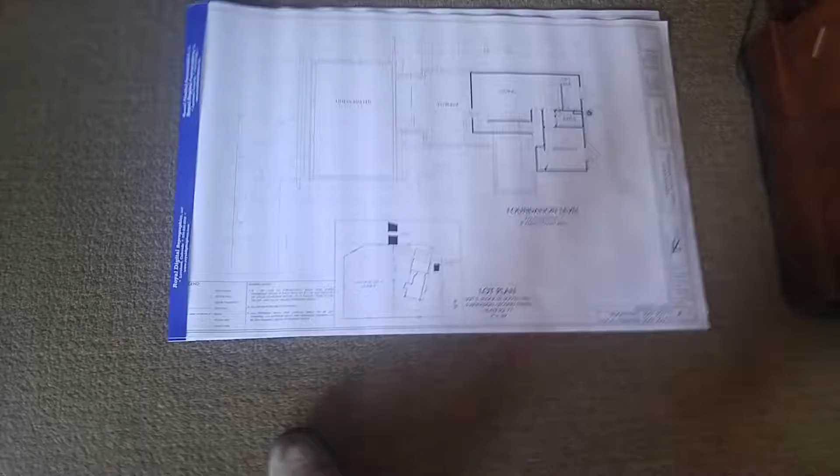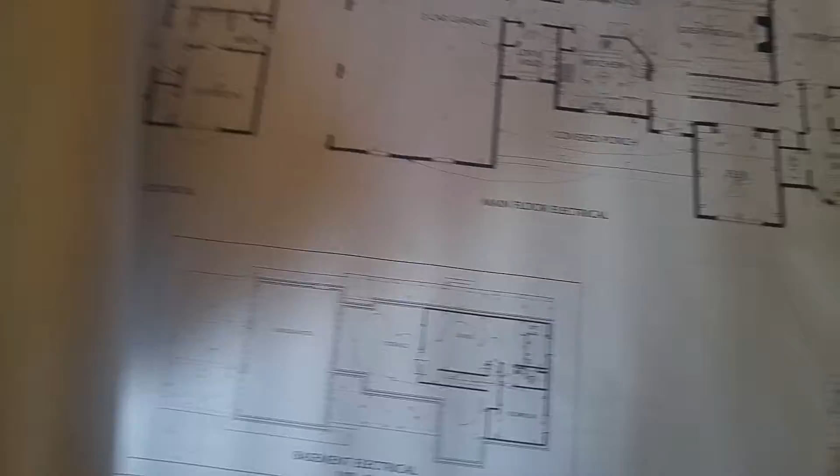Alright, first you got to do the architectural set of plans. This is the architect's job, or in this case, my job. Floor plan, pretty self-explanatory, all the stuff that goes into it, details of the home, section views, the trusses, things like that. All fun stuff you learn in college, or sometimes you don't learn in college. Elevation view of the house, everything everybody needs to know, electrical plan, yada yada yada. And that gets you through the biggest step, step one.

This is all the inclusions of a building permit for the town of Windsor. You can see there's a lot of check marks on there. I finally got this all done. So that was a bunch of those check marks.

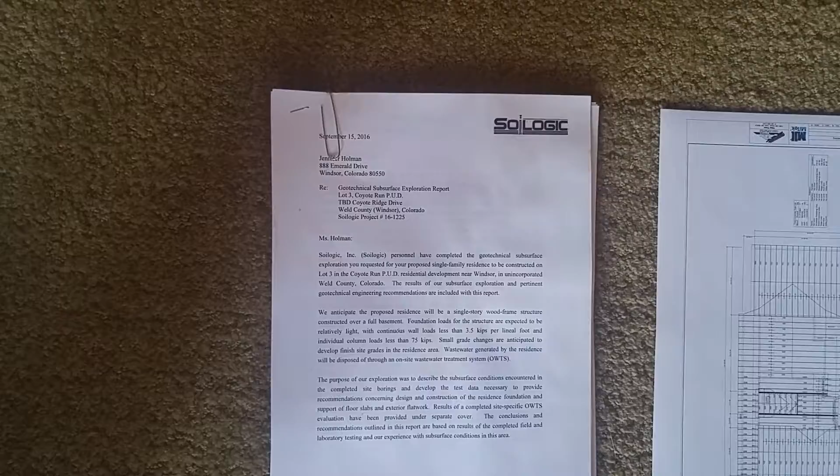Next, soils report. Can't figure out what the foundation is going to look like unless you know what the ground underneath is going to be. So you hire an engineer to go do a soils report. He drills holes out in the lot, figures out what the dirt's like, and then writes a whole report that's like 80 pages long. If you ever have trouble sleeping at night, read any soils report ever written, ever. You will fall right to sleep.

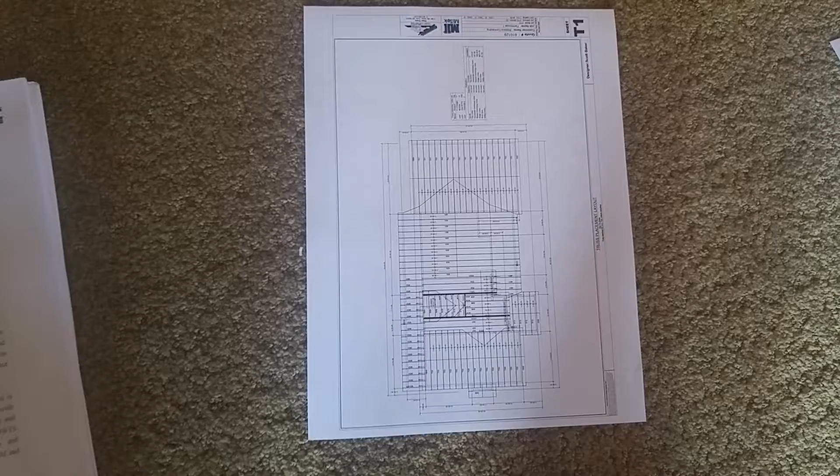After that, send it to the truss company. Let them do more engineering. Have an engineer do all the truss layout. There's about an 80-page report that goes along with that I did not print out because that would be a terrible waste of paper. So you get that plus that.

You can send it to the engineer who's going to do the foundation report. There's a third engineer already involved. He does the foundation design. That's probably 3-4 pages of specs and details and stuff on how to build a foundation.

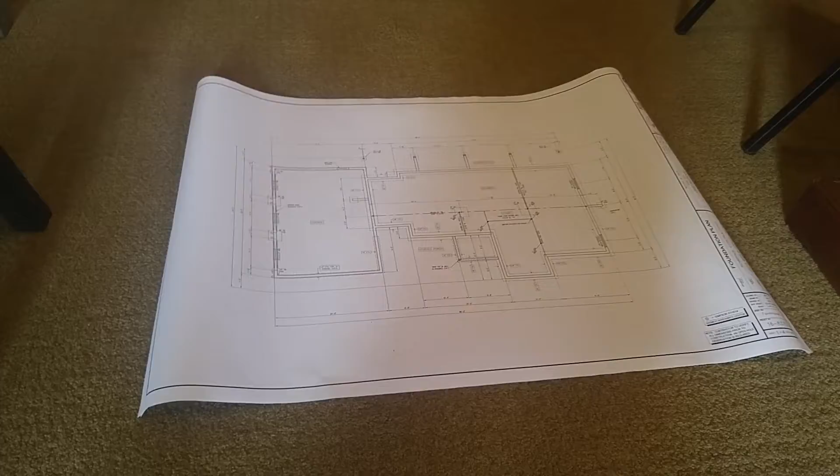Get all that. Here is the architectural control, so I could send these plans to these guys to make sure my house is pretty enough to be in their subdivision. This is usually controlled by the HOA. They want to know colors and stone types and all that fun stuff, all the pretty aesthetic stuff.

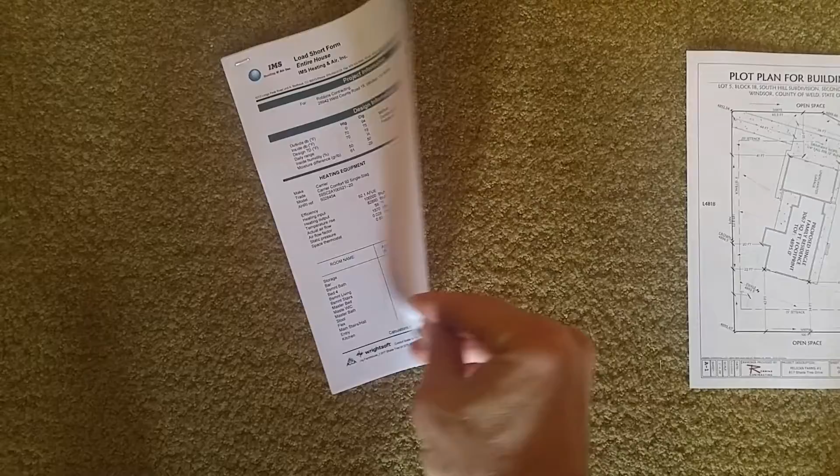Then you move past this step, you get through the engineering. Now we're getting close. Although, we got to figure out what HVAC systems fit in here. So this is called a Manual D and Manual J. You guessed it, another engineer. He's going to calculate and figure out what air pressure needs to go through all the duct systems and what size ducts are going to go everywhere to get the house properly air conditioned. That's 30 pages of more calculations.

Lot plan, we're getting close. Boy, I can do this myself. All this is how the house is going to sit on the lot. This is the lot. So then you start talking to the town engineer and they start telling you all the stuff you got to have, foundation heights, yada yada yada.

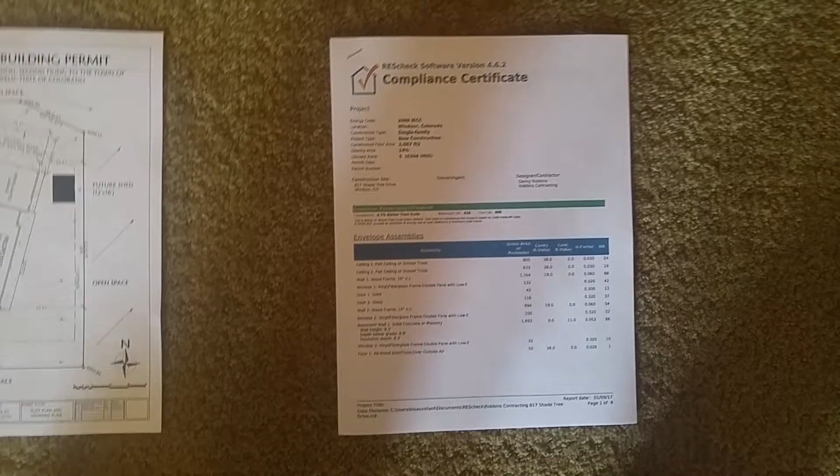And then a REScheck. We went through everything else except for energy compliance. So this basically says that your house is going to be insulated enough. You have to specify all the insulation ratings, all that. In the code anymore, you have to make sure you have this all certified, and yes, designed by an engineer.

So you wonder why house prices are so high? It might have to do with all the engineering involved. This is Tyler with Robbins Contracting. Now you know.